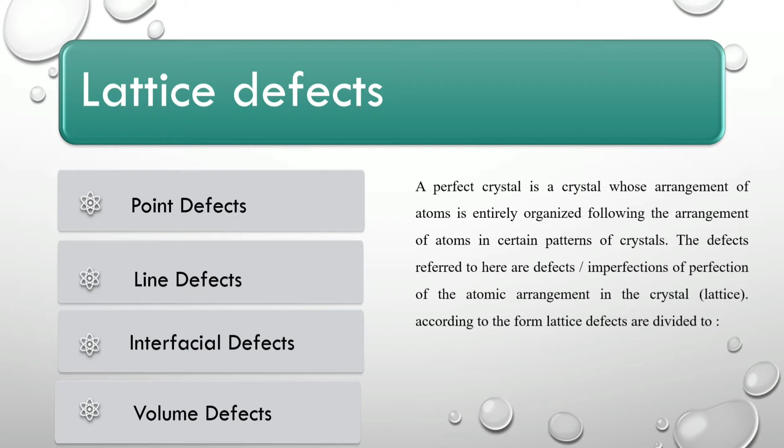The first is point defect. Point defect is caused by the vacancy or escape of atom structure. Point defect can be either vacancy, which occurs due to not being filled position of atom in a lattice or lattice vacancy site, that is the site that should have been occupied by the atom. Vacancy is formed during the freezing process and also due to the vibration of the atom, which results in displacement of the atom from the normal lattice site.

Impurity is the presence of a foreign atom that replaces the place that should be filled by the original atom. Impurities are foreign atoms that are present in a material. Pure metal that consists of only one type of atom is not possible. Impurity can cause point defect in crystal. There are alloys where impurity atoms are intentionally added to obtain certain characteristics of the material, such as increased mechanical strength or corrosion resistance.

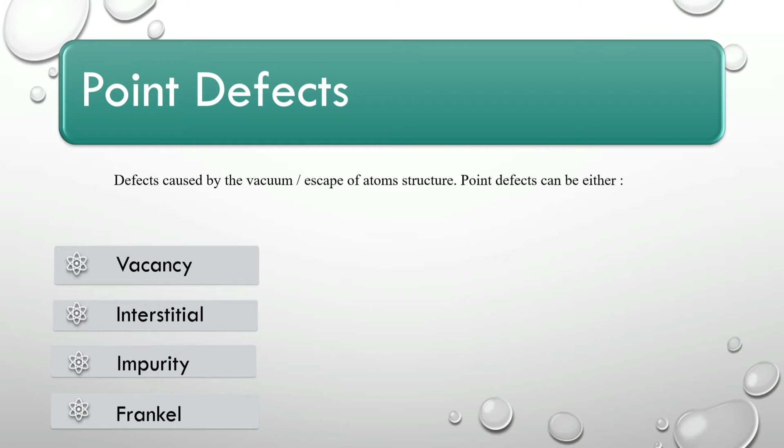Schottky and Frenkel defects are found in ionic crystal. Schottky defect is in the form of a vacancy at a lattice site together with an interstitial on the surface, whereas if a vacancy is paired with an interstitial inside the crystal, a Frenkel defect is formed. Point defect can be seen in figure 2.1.

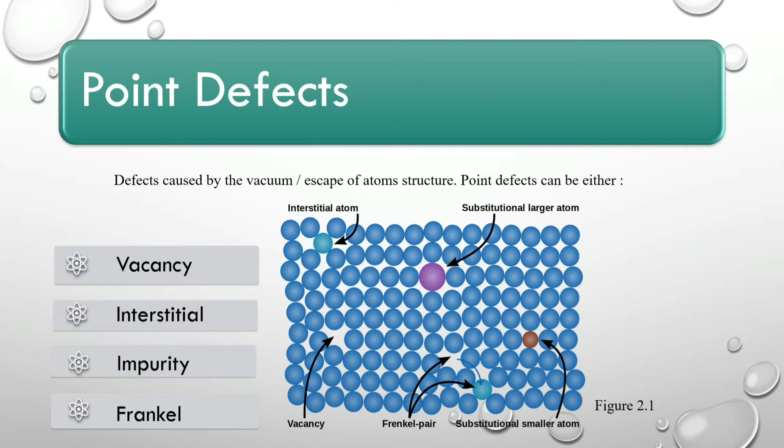Next, line defect. Line defect causes distortion in the lattice centered on a line, often called dislocation. In general, there are three types of dislocation. The first, screw dislocation. Screw dislocation forms due to the shear force given, causing distortion, as shown in figure 3.1.

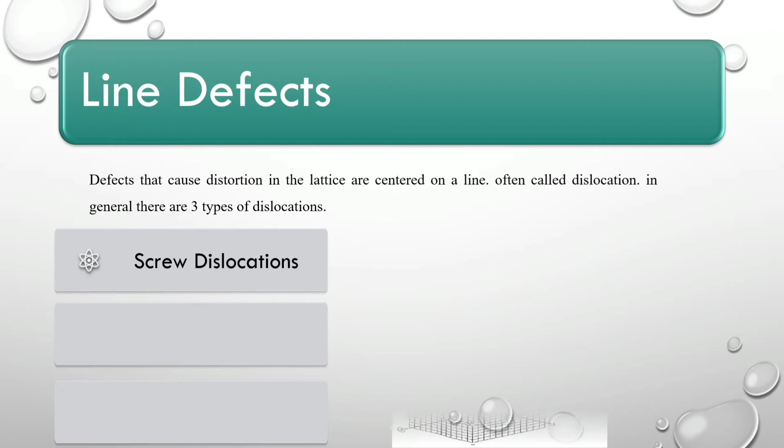The second, side dislocation or edge dislocation. Side dislocation is the presence of an extra atom field or half the field, where the side is cut off in the crystal. Figure 3.2 shows a schematic of the side dislocation.

And the third, mixed dislocation. If the material is found to have the two types of dislocation above, it is said that the material has mixed dislocation. An example of mixed dislocation can be seen in figure 3.3.

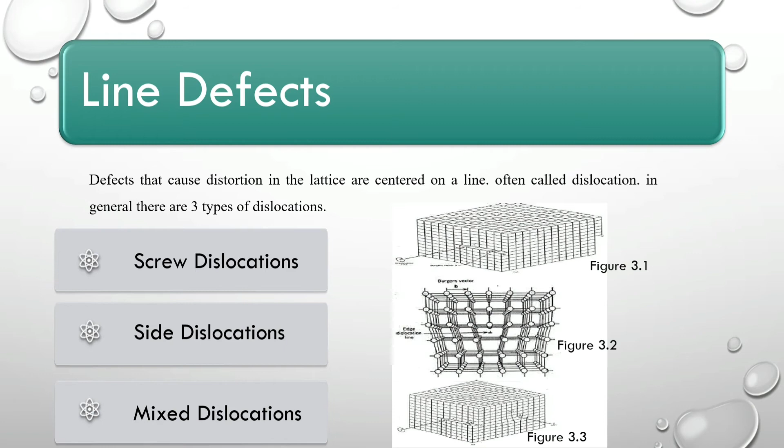Next, interfacial defect. In polycrystalline material, solids are composed of small crystals called grains. Its grains can be sized from nanometer to micrometer. At every point, the atoms are arranged in a certain direction, and the direction of the regularity of this atom varies from one grain to another.

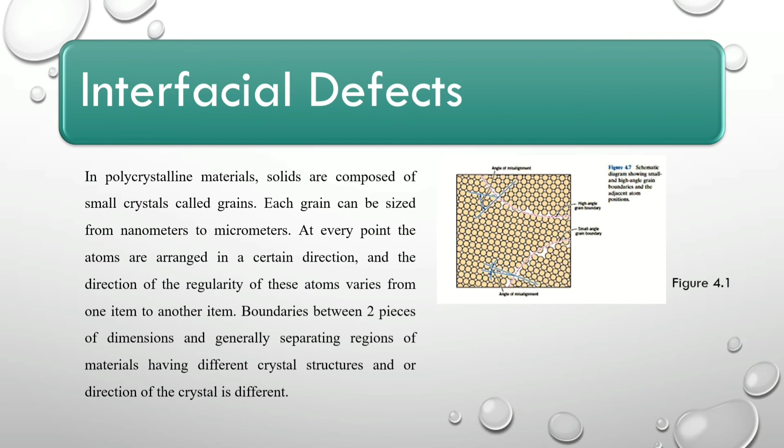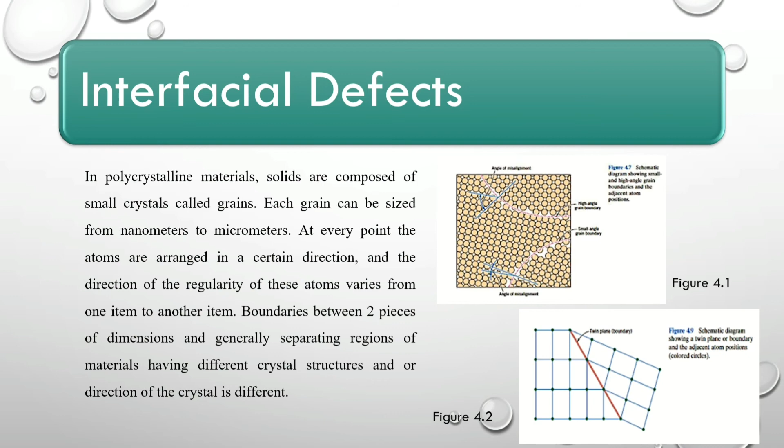And the last, volume defect. Volume defect is the imperfection of crystal in atomic space, namely the appearance of cavities between grain boundaries due to grain orientation, and can be seen directly. The presence of volume defect in material usually has an impact, for example, on the nature of the material, which will cause a change in material density, especially in the presence of pores or a second phase of the material.

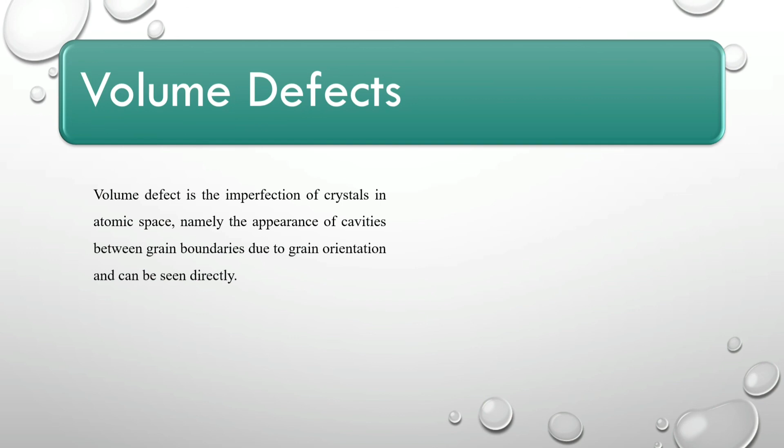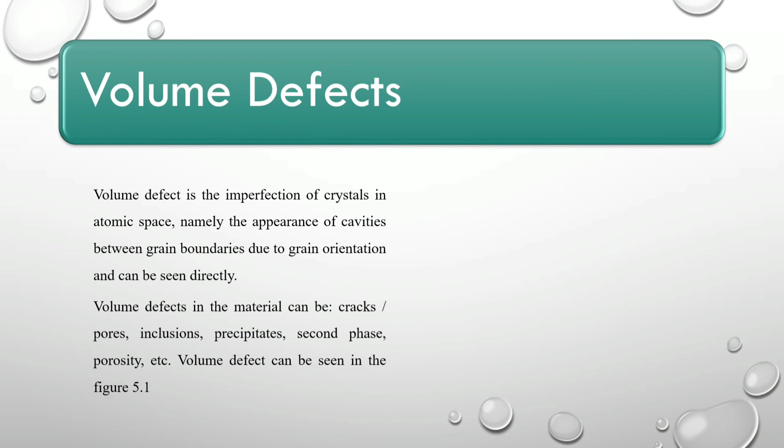Volume defect in the material can be crack or porous, inclusion, precipitate, second phase, porosity, and other. Volume defect can be seen in figure 5.1.